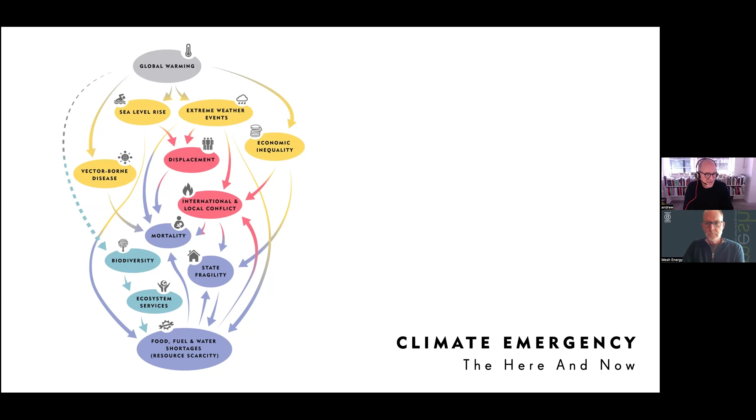The built environment is a major contributor to greenhouse gas emissions, and in fact construction, probably in the UK, about 25% of our emissions are purely down to construction and the process of construction, the materials that we use.

And this is not a new conversation. In fact for the last 60 years we've been talking about this, and for a typical apartment building over 60 years, in the 70s that was really all about operational carbon. So over 60 years, about 60% of that was really all about the operational carbon - the heating, the lighting, the air conditioning of those buildings - and say 20% odd was around the construction.

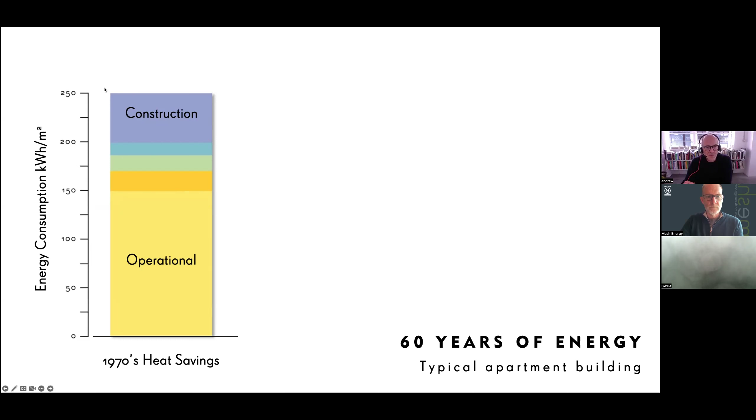And we got better at that. So by the 2000s we had really reduced that operational carbon down, and we'd increased the burden of the construction emissions that go into making buildings, because we started to put in insulation and double glazing, which is how we got these incredible operational carbon savings.

In doing that, we started to look for other low-hanging fruit for how we can improve our buildings, and that has come primarily from the energy frame - thinking about solar panels, ground source energy, neighborhood generation systems, wind turbines, etc.

Over the last 20 years we have driven that right down, so a contemporary building that adheres to building regulations, Part L etc., that's a low carbon, low operational carbon building - only a tiny proportion of that building's carbon over its lifetime is now down to operational carbon. Yet more than half is down to construction and to the choices largely of the architects and engineers who make those buildings.

And yet this is not something that we speak about. This is not something that makes up part of the frame of success for our buildings, and not something that, in the UK at least, is legislated at all.

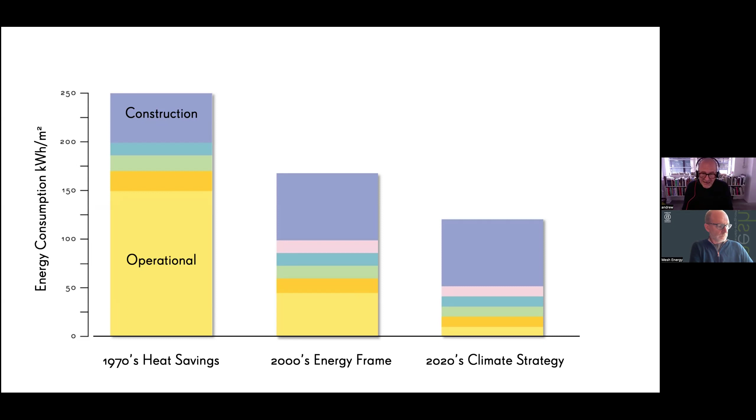And so we see buildings such as this amazing building by Foster's being given awards, being given the Stirling Prize on the basis of sustainability.

And yet, we were told by the services engineer that the £100 million they spent on this building, taking it from a building regulation compliant building to a LEED platinum, BREEAM, absolutely incredible type of building, that £100 million could have been saved if they'd put a poster up outside the front door that in the wintertime said 'put a jumper on,' and in the summertime said 'take your jacket off.'

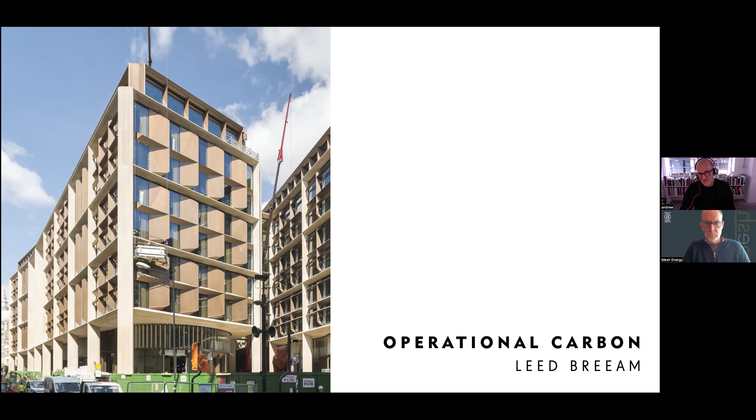The embodied carbon of tall buildings, built for density, and the idea that we can build super tall in timber and store massive amounts of carbon, is really the other end of the spectrum of thinking about how we can address the climate and carbon issues of construction and architecture by building massively in timber.

I think the excess of reducing operational carbon demonstrated in the Bloomberg building and the excess of embodied carbon demonstrated by super tall timber buildings are not dissimilar. Because actually the truth is that what we need to do is make smaller, simpler buildings from bio-based materials.

We need to reframe notions of success in architecture away from the tallest and the glitziest, to the buildings that allow people to be happiest and healthiest, and for our cities to feel like a joined-up constant conversation of architecture and society's needs, rather than individual idea explosions.

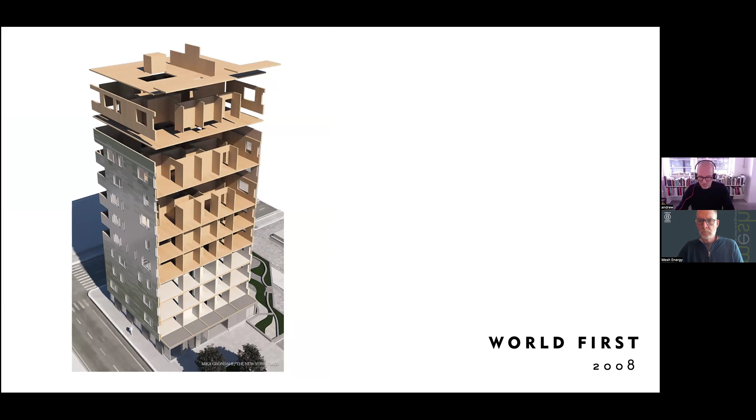We really started this journey in 2008 with I think our third or fourth mass timber project, a CLT project called Murray Grove in Shoreditch, a 9-storey building for Metropolitan Housing Trust, a housing association, with 29 apartments, 9 stories, and over 1,000 tons of CO2 stored within the material of the building.

Very fast, very efficient, very precise process - 27 days, no jackhammers, no grinders, no cement mixers, all built with cordless screwdrivers, and no tower crane.

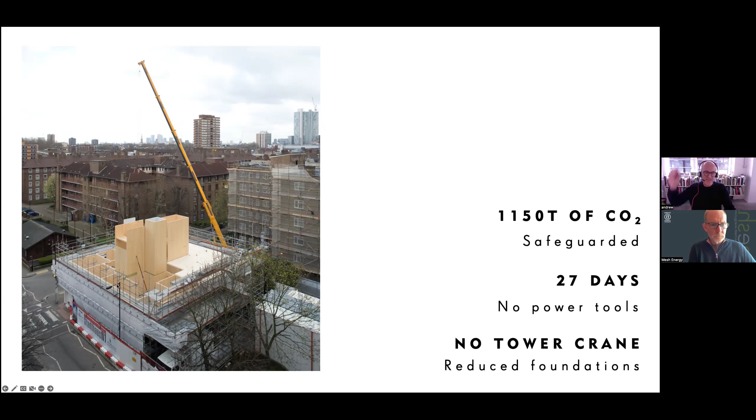So everything was done from the back of a mobile crane. You can see the adjacent buildings - the closest sitting rooms to the building site are about 8 or 9 meters away, and we didn't have a single complaint during the whole build process. That building is a honeycomb.

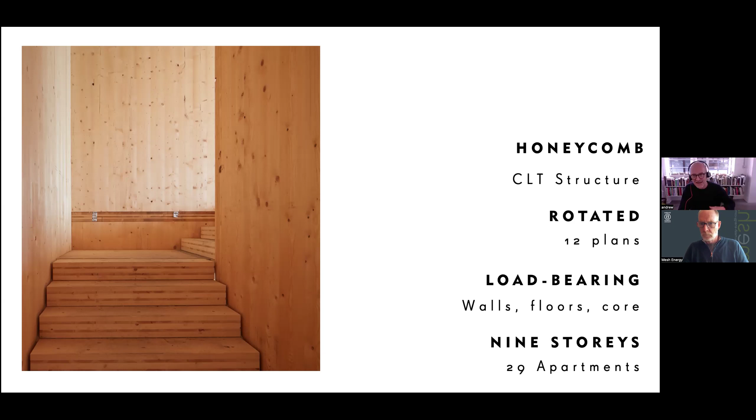So really, every piece of CLT, every piece of cross-laminated timber in that building is working really hard. The external walls, the internal walls, the floor slabs, staircases, lift shafts - everything made of timber.

You can see inside here really simple details. 15 years ago when we were first working in cross-laminated timber, there were only 2 different types - a thick one and a thin one, and that was it. So it was a very rudimentary process.

You put in as much timber as you could, and fixed the whole thing together with a 75 mil galvanized angle bracket and a 100 mil screw. You can see the whole building here is detailed that simply.

On the soffit here, you can see on the slab these little plastic tags which took all the services. So a very fast, very accurate process.

Much less waste because of the prefabrication - everything arrives on the back of a truck, cut to size, plus or minus a couple of millimeters. So much less waste, hardly a skip taken from site in terms of site waste.

Far fewer deliveries, about an 80% reduction in traffic. Even though we were importing the material from Austria to build the main structure of the building, it was still a vast reduction in terms of deliveries to site.

And lightweight - the structure weighs around 20% of an equivalent concrete structure. So the implications of that for transport, but also for reduced foundations etc., are a very important part of that.

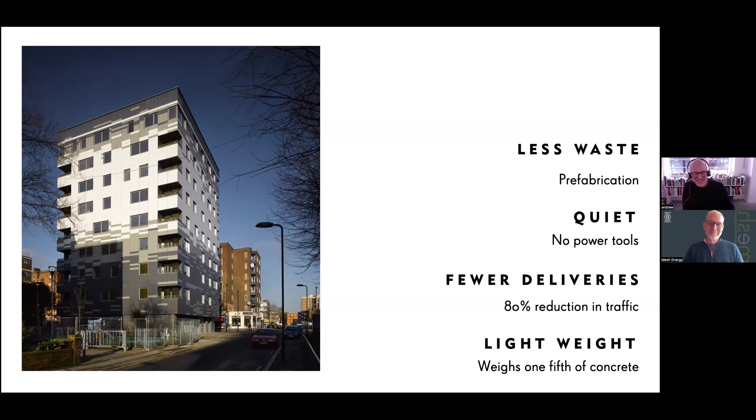And it's still there. Every Saturday morning I cycle past it with my daughter on our way to swimming lessons, and it's still standing and still a successful piece of architecture, I feel.

We had a lot of interest in the building, really to our surprise, and so we decided we could go one of two ways as a practice - we could keep this information to ourselves as a branded technology way of building, or we could talk about it to everybody who would listen, sharing drawings, sharing information, sharing learning.

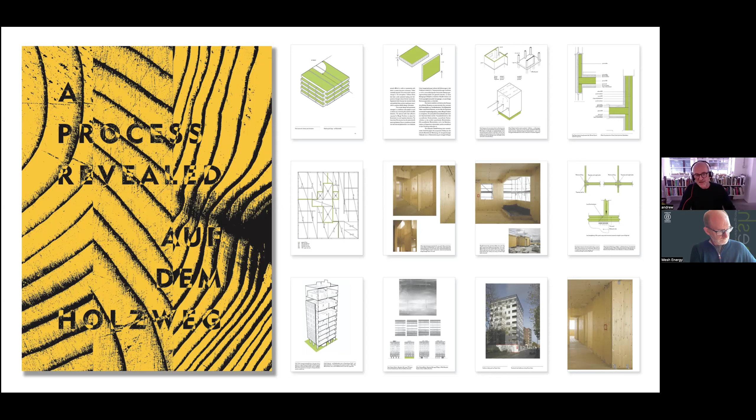That really has been a foundation of the core ethos of the project: understanding that what we are doing is a collaborative effort, and that we want to engage in conversation within our industry to encourage other people to build in mass timber, to build in CLT, to share learnings in a new way of thinking about architecture, and to engage in conversation around how we see the success and responsibilities of architecture on a greater scale.

That book has been followed up by many pieces of research. About 20% of our turnover as a practice is pure research. We've just finished this piece for Timber Development UK, a timber promotional agency, based on timber typologies across different types of construction, from timber frame to closed panel to mass timber, and policy - how local and national governments can adopt policies from elsewhere to promote mass timber and other bio-based materials, and help authorities talk about embodied carbon as part of carbon reduction, including how we measure life cycle assessments of timber and use those metrics to quantify and make further savings.

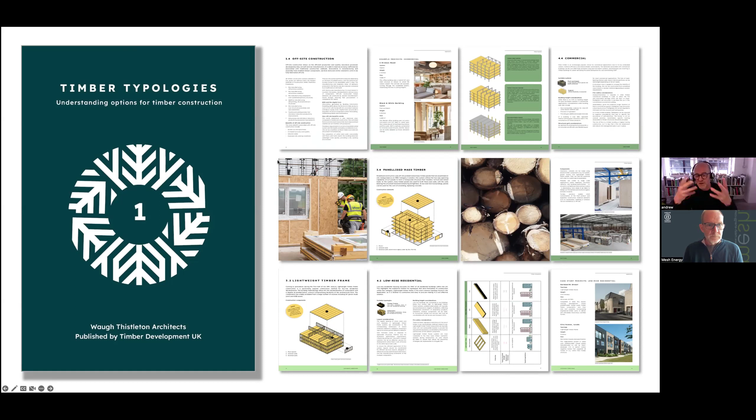Very much part of what we do as a practice, and how we talk about what we do, is to be as simple and clear and have as much visual clarity as we can muster. So this is very much along those lines - you can see that. And all these books, by the way, are accessible from our website and free to download.

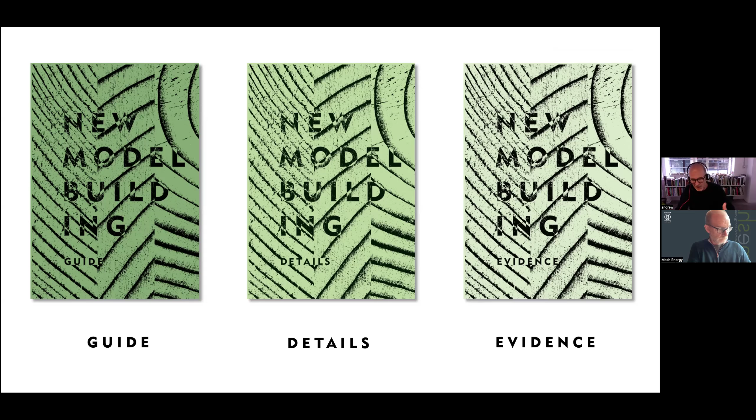Another project we've just finished, with NHBC, working with Buro Happold and University College London, is to look at how we can build competently and safely, how we can design safely in mass timber for residential buildings in the UK, completely within current UK building regulations. We've done that by producing, again, three books - a guide detailing 30 different junctions across a generic 6-storey building, and the evidence that backs up those details, in order to receive a warranty from NHBC and compliance with building regulations.

You can see examples here of some of those details. Each one of the 30 details describes a kind of junction across the building - where the external wall meets the internal wall, where the roof works, where the party walls work. The basis of this building is that it's residential use, fully sprinklered, all the timber is covered with plasterboard, and it's below 18 meters, so typically a 6-storey residential building. But we have a full letter of pre-approval from NHBC for this system.

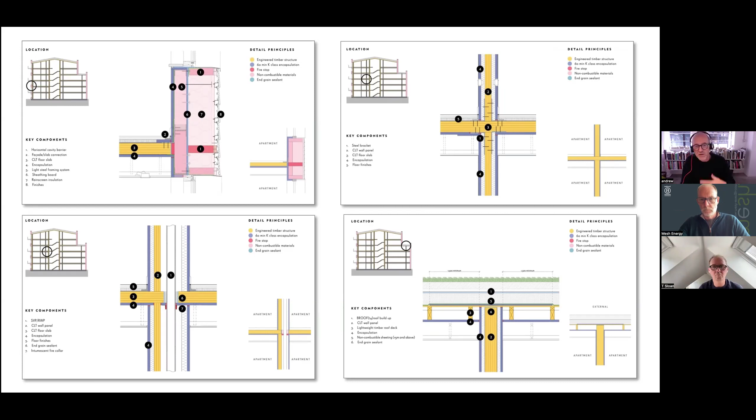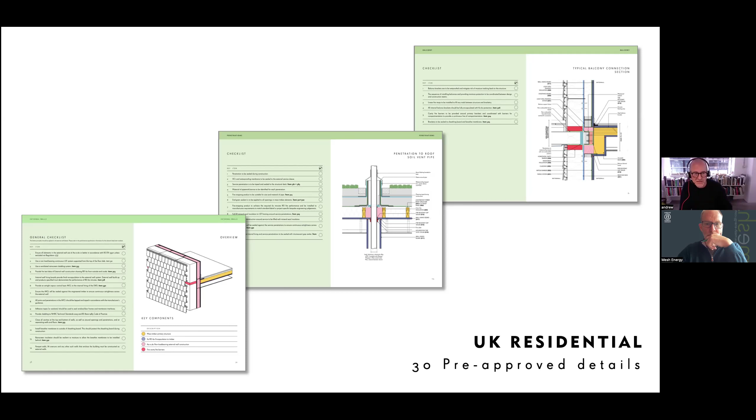The system, which you can download online, includes all those details but with a full checklist of all the different products that can meet those individual details, and how those details go together - the construction process of those details.

We're also doing an extensive amount of work for the EU. At the moment we have about 25 million euros worth of European research funding. We've just finished Build in Wood, a technical guide to timber construction across 27 different regulatory environments - so you can imagine quite a lot of work in there. That was a 3-year project.

We're working now on Wood Circles, which looks at how we design buildings for adaptive reuse, for reusing and recycling materials, how we monitor those materials, and how we can manufacture and process them. That's working with software manufacturers, timber manufacturers, local cities and developers to develop design criteria enabling reuse and recycling of materials. And now we're looking at a design guide specifically in architecture for timber construction across the EU - that one we've just been awarded, so it's just started.

Timber House, that's called. And then just to talk today about a specific project. So we have now 30 completed mass timber projects across France and the UK.

This one completed at the end of 2022. People moved in beginning of last year. This is the black and white building, 5,000 square meters of co-working space for the office group, who are owned by Blackstone, a global investor. This building is in Shoreditch in central London.

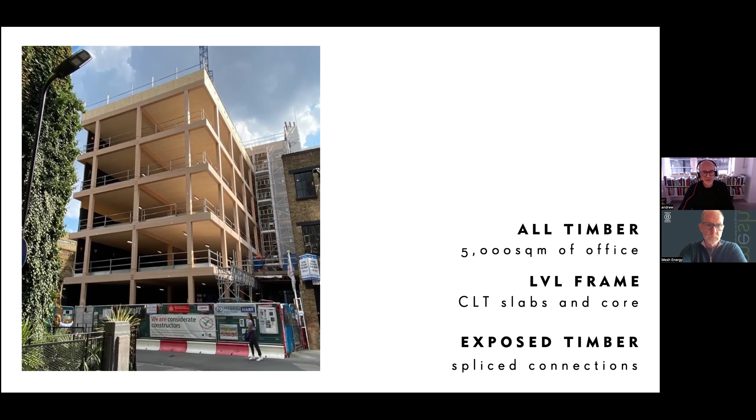So you can see the truck arriving on the pavement outside the building, a very tight site, with no space really for any kind of set down or lay down areas for building materials. So pretty much everything at the second stage of the construction is craned into place.

You can see here each panel arriving with a specific instruction, a specific QR code onto that piece of timber, and being craned into position, accurately into position. There were 893 individual timber components on the site.

From the ground floor slab up, the entire structure took 14 weeks to build. We were 83 weeks on site, and that includes 20 weeks of foundation work and another 8 weeks of demolition in the beginning. So a very fast and very quiet process.

Interestingly, one of the things we look to do is to reduce the amount of timber we use in all of our projects, so that we are constantly reflecting on how much timber we're using per square meter of building. We're thinking about how much timber we can save through an engineering kind of process, and that's very central to the design.

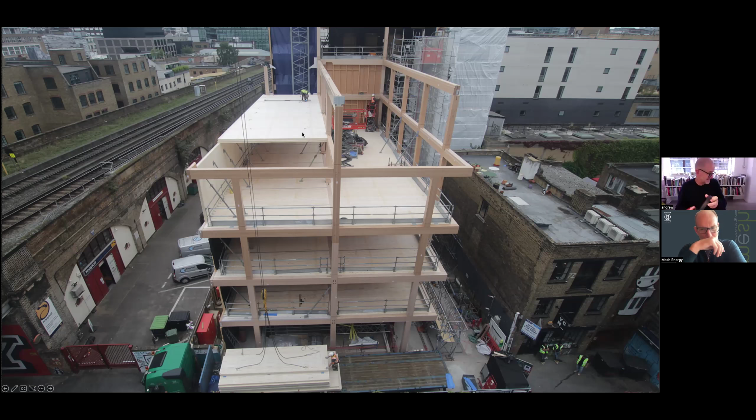Yeah, there were. It was a nightmare, it was hellish. We had to give them lots of information about process. I've got some external noise coming into this, I won't be one sec, I'm just going to check that. I know, but you just ask them to stop shouting. I know it's off-putting for you, but we can't hear anything. Oh, you can't hear anything? No, okay, no.

Yeah, it was really difficult with Network Rail, and you can see that we have a solid party wall against the building, but certainly we had to go through all of the fire regulations with Network Rail, all the kind of demonstrations of all the fire testing that had been done. So yeah, it was quite challenging.

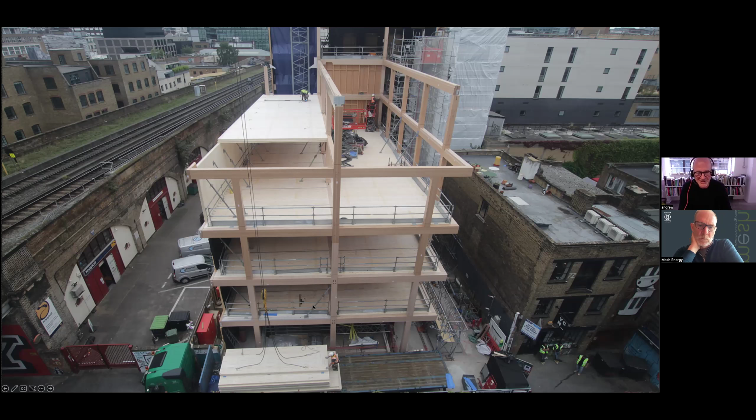And just going back, Andrew, when you mentioned Blackstone being the owner of the building, what's the why behind this? Who chose to do it in this way? Is it something that Blackstone or the office group were looking for?

So the office group came to us to build them a low carbon building.

The office group takes sustainability seriously, both in terms of their own internal scope 3s and ESG requirements, but also I think that's part of the ethos of the company and of Blackstone. They're very aware that building a visibly low carbon building can add value to their proposition.

In the US, our projects in the US development market make it absolutely clear that timber buildings are worth more, especially within the commercial market. That conversation in the UK is not as easy, but certainly for TOG, I think that was a major driver - they were pretty confident that building a timber building would pay dividends for them.

Blackstone were obviously in a privileged position where they could drive change more quickly. That pace of change could happen quicker with Blackstone's input, I suppose. Certainly, and it was office group driven rather than Blackstone driven.

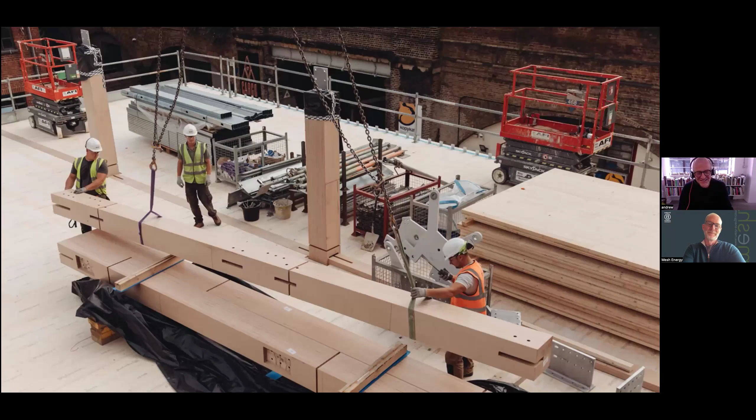You can see here where the timber beams are spliced in order to take those connection details and the dowels that fix those together. You can see some of the labeling on there with the barcode as well. We had 7 people on site for 14 weeks who built the entire structure.

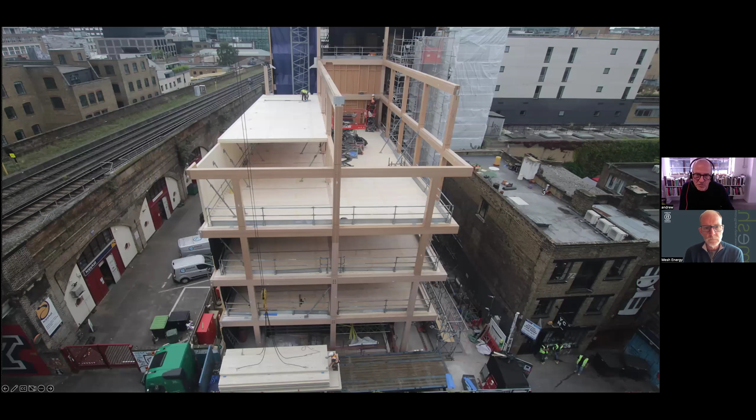And you can see here as well, interestingly, where the beams are spanning further, they're projecting up into the raised floor, so that the underside of the beams, the soffit line, is the same, but the beams step up into the floor void depending on the spans.

You can see the care and accuracy that this is going together. So you have a very different kind of construction site, based on accuracy and precision, with no bashing or banging or toxic materials, or lines of cement mixers down the road chugging away waiting to pour cement into the site. In its place, you have scheduled deliveries of timber, which are accurately craned into place and screwed down.

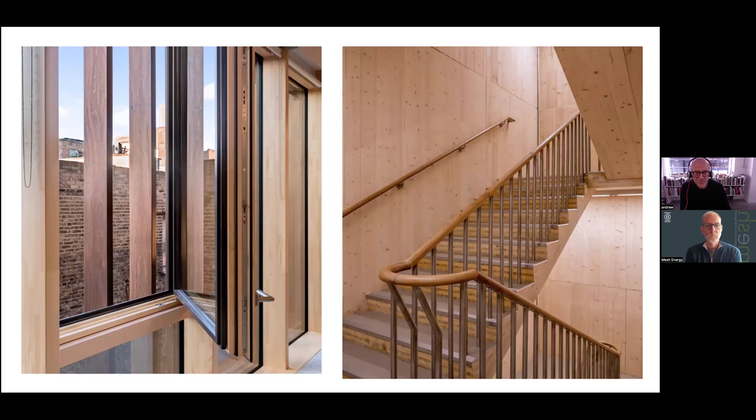We have, further to that, opening windows throughout the building. The solar shading on the outside of the building, which you would have seen from there, allows us to have completely clear glazing.

So we don't need any e-coatings on the glass because we have the solar shading that's preventing solar gain in the summer and encouraging solar gain in the winter. And that allows us to have completely clear glass, and there are a couple of principal benefits to that.

One is that I think the difference in the environment internal to the building has definite health and well-being benefits. You can tell what the day is like outside. Your eye has an understanding of the circadian rhythms of the seasons, of the day, of what time of day it is, which is much better for us.

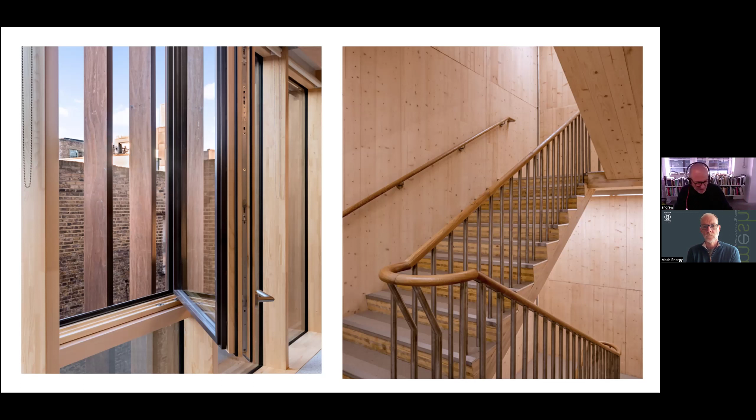The data is clear that people who work in environments with natural daylight and natural materials have lower stress levels, better attendance, and are more likely to stay working for that employer. They get better faster in timber hospitals, learn more quickly, and have better concentration in timber schools.

So these natural materials and natural light are a very big part of that design. And also the staircase here, you can see on the right hand side - making attractive staircases that people want to run up and down, staircases that smell nice as well.

Iona's just picked up on the conditions. You seem to have had fair conditions during construction, and she's asked if there would have been any damage to the timber from weather if the conditions weren't as good. We had a good contractor and a great client who listened to us, thankfully, who took the specifications seriously and followed our experience.

And so we were able to put in place, because of those relationships, proper plans for moisture management during site construction. We were able to discuss with the timber subcontractor how they were able to sand off bits of moisture damaged timber.

So where there was any moisture staining - and we did have a lot of rain as the building was going up - we have systems clearly in place for how to take care of those. In fact, we've done some work with Swedish Wood, who have a really good set of moisture management plans on their website.

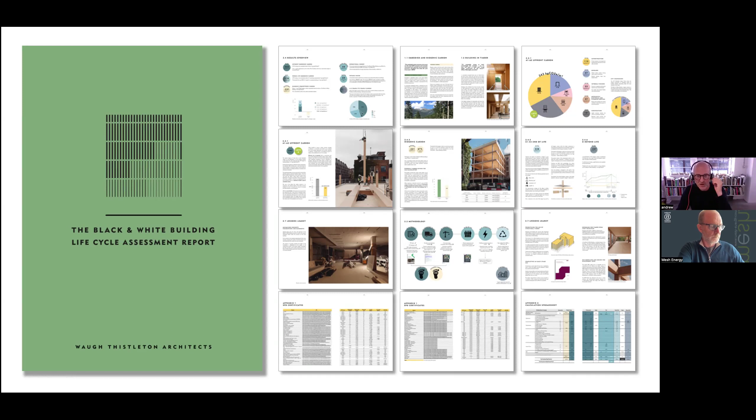Again, this is available on our website, and that covers stages A through D - just to set out what those are for people to be clear.

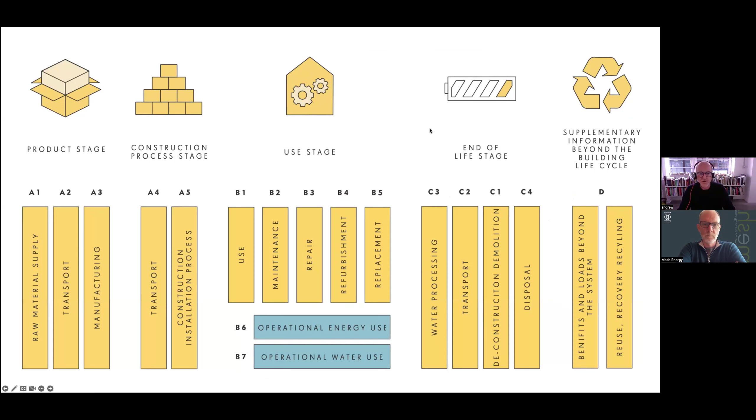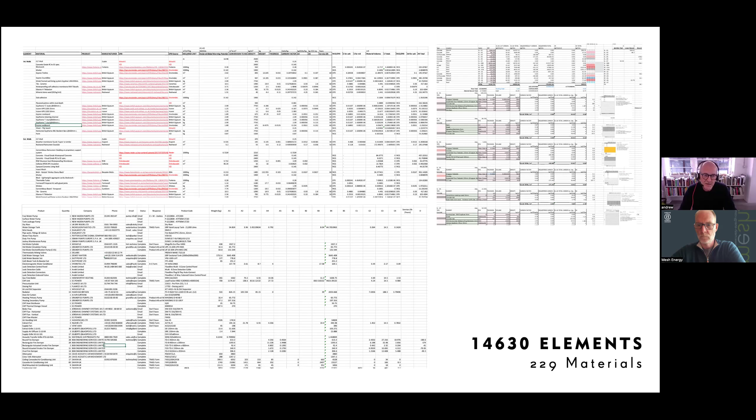We do all of this in-house as part of our process, and we analyze all the elements of the building. In this situation, we analyzed all 14,630 elements of the building. We took the EPDs from each one of the 229 materials in the building, and we're able to make design and material choices often based on that knowledge.

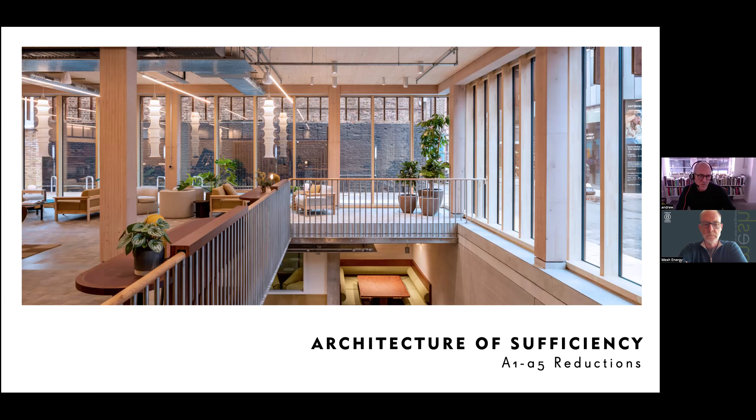So the reductions we were able to make in the design and construction of the building begin to inform the architecture - what we call an architecture of sufficiency, where everything in the building is doing what it needs to do. There's nothing ostentatious here, no cantilevers, no overblown forms or unnecessary parts of the building. It's really driven to necessity and to an understanding and enjoyment of the materials and components we use within the building.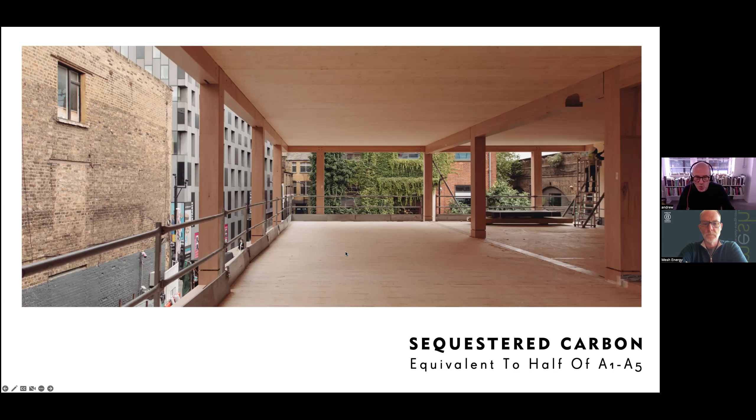So we've managed also to quantify the amount of carbon that's stored within the timber. As a tree grows, it performs photosynthesis, which absorbs carbon dioxide from the atmosphere, stores the carbon and releases the oxygen. The carbon stored within timber, within a European spruce tree, about 70% of the volume of the tree is carbon, so we're actually able to quantify that carbon. About half the carbon it takes to build the building is sequestered, stored within the body of the building itself.

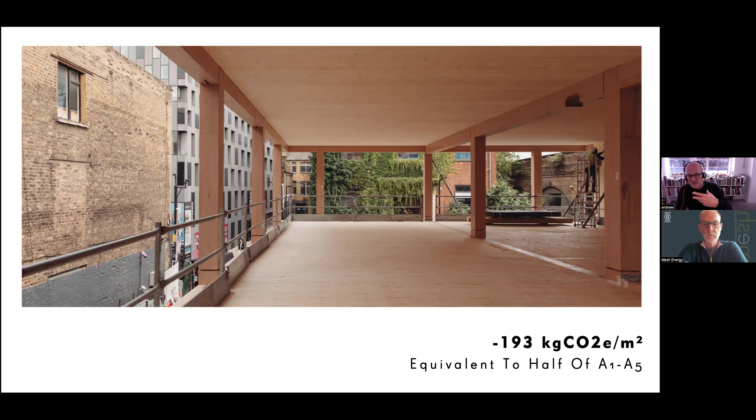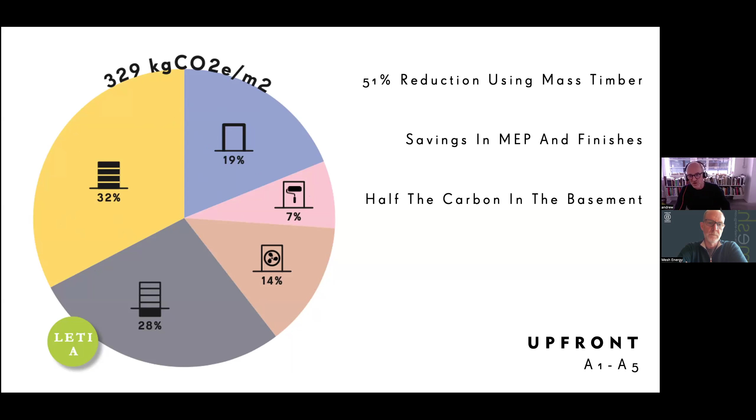So that's 865 tons, which gives us, as I was saying before, a minus figure. In terms of our upfront carbon, our construction carbon, you can see here the basement at 28% is a massive amount of the carbon in the building. The services, the decorations, the envelope of the building, and the structure itself, which is usually the dominant part of any A1 to A5 calculation, is actually a relatively small part of the carbon — about a 51% reduction from a concrete equivalent by using a timber structure.

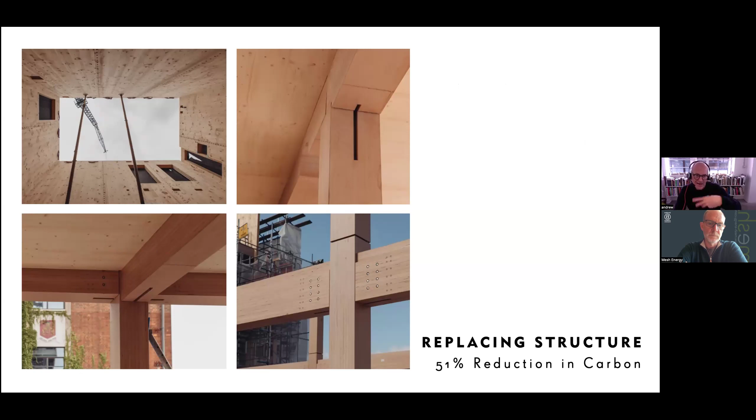So replacing that structure — the lift shafts, staircases, the beams, columns, how we connect those details, and how we use the flooring composite in a diaphragm action — are all very important. And then it's all about reducing the finishes and the MEP; the solar shading on the outside of the building allowed us to reduce the services in use by about a third across the building.

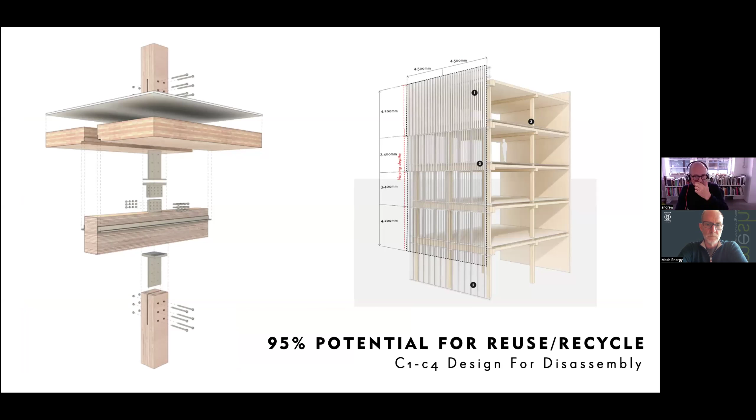Also by specifying reused raised floor, carpet tiles from recycled sources, reused furniture, that kind of thing — that really brought down those B1 to B4 figures. And then looking at the potential within all of the materials for reuse and recycling, designing for disassembly was very much part of the process of choice of materials.

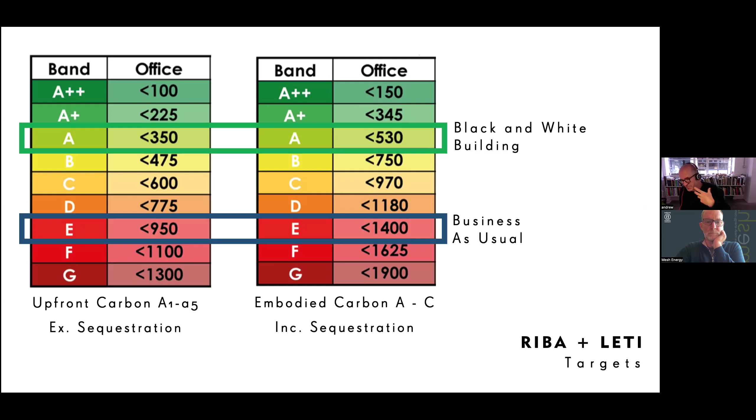So how we place ourselves in that — actually this is better now, because I think we've just nudged an A+ with a full understanding of the report. So business as usual, just so people understand, is about three times what we were able to achieve with a black and white building. Business as usual is around 1,400 to 1,500, and we're at 500 kilograms per square meter of embodied carbon. Just understanding that making these sorts of design decisions, building with these sorts of materials, really does make an incredible difference to what is achievable.

And that was on the basis that you brought this in on a budget that was slightly, well, 5% or thereabouts more than concrete, but not taking into account all of the well-being factors you mentioned previously. Absolutely — it's not, and also the increase in value. Blackstone have written the increase of value up since completion, which is 18 months, and in that time they've increased the book value by 15%. The rental they've achieved is 40% higher than their initial projections, and we were 65% pre-let on the building.

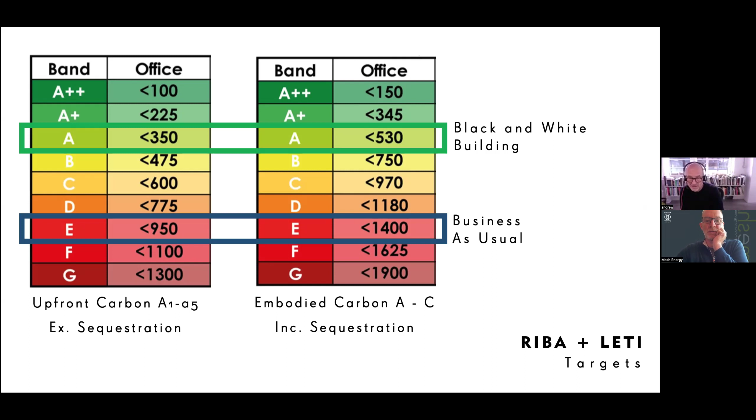Andrew, I'm conscious of your time — there are some questions, but did you want to get to the end of your presentation? I'm pretty much there, actually.

Fantastic, no, very, very impressive. Not wanting to take up — let's get... oh, don't worry, it's fine. No, fine, I'm just thinking of going back, and Mario has a couple of questions. Mario, did you want to come off mute and just talk about the solar shading? Or unless you don't have a mic.

Anyway, Andrew, you can see Mario's point there around shading done vertically, not horizontally. The axis of the building is south-southeast and north-northwest. So on the back of the building, the solar shading runs horizontally, where it faces south and southeast, and this elevation of the building faces north and northwest, so the solar shading is vertical. In fact, across the building we have 16 different forms of solar shading, including the depth, the orientation, and the inclination.

So at the back, they're tilted at varying rates depending on the solar gain into the building, and also the frequency of the solar shades around the building. And so we did that.